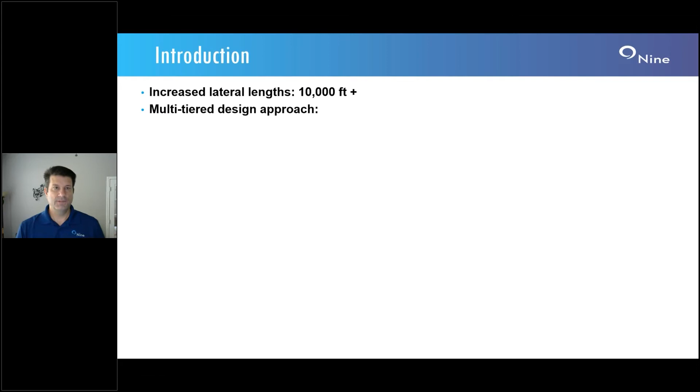And that may include all of what I'm talking about: addition of chemical pipe-on-pipe lubricants. This is probably the cheapest method to try to help us reach target depth. They are actually fairly effective. However, in a plug and mill operation, we'll see a lot of wellbore debris, sand, and of course the plug parts themselves. And these are, as the name implies, pipe-on-pipe, not pipe-on-debris lubricants. So you definitely get a decrease in effectiveness whenever you're dealing with a wellbore full of sand.

We can optimize the string design. There's a paper that I co-authored that was also presented earlier this year, which was 199843. And so this is really looking at individual wells and optimizing the taper designs to apply more weight on bit. What I would usually see is an increase of anywhere from 800 to 1,000 feet or so with optimizing string design. And then of course the last one is really the topic of this paper, and that's the addition of these extended reach tools.

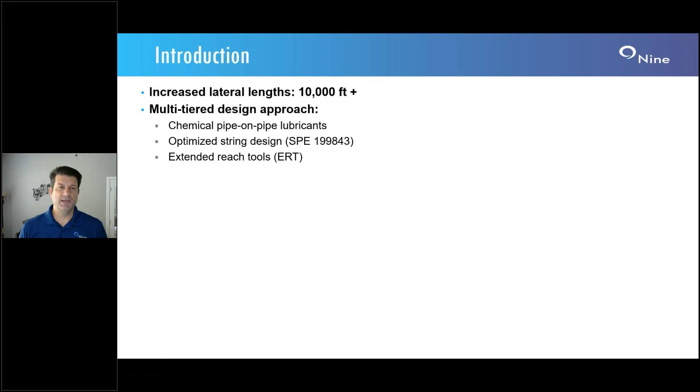And if we break out the extended reach tools into 2 sub buckets, we have mechanical inertia tools and flow interrupting tools. And for coiled tubing, the most predominant method is these flow interrupting tools. And as you may know, there's several of these out on the marketplace today. They all use a different mechanism to give that flow interruption. So there's a rotary valve, a poppet valve, and a fluidic flow modulation, just to name probably the top 3 in the marketplace today.

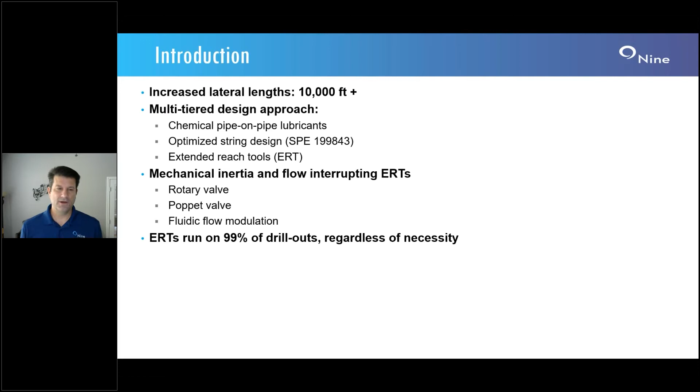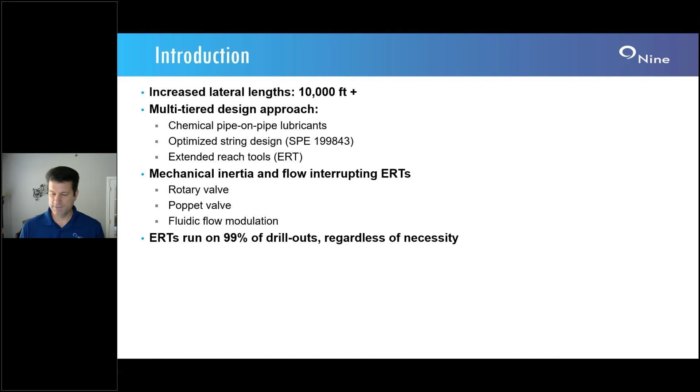And what I'm seeing in the industry today is that these tools are relatively inexpensive. So for the cost of the whole entire service that's out on location, adding an ERT on the end of the coiled tubing for the additional $1,200 or whatever it costs is pretty insignificant. So regardless of if we need these things, our customers are still running them. I'd easily say 99% of all the coiled tubing intervention drill outs were running an extended reach tool. And so that brings us to the challenge of how do we go about modeling these tools on the end of our coiled tubing?

So the most common model in the marketplace today, that's easily accessible by the majority of independent coil providers, has some default model assumptions. And these assumptions basically integrate a friction reduction factor: so many pounds force of friction reduced per barrel per minute of pump rate. And that ratio was really developed, I think, a good 15 years ago from some testing that was done. And since then, these tools have become much more powerful. So I think that some of those defaults, those assumptions, are no longer valid.

The newer tools on the marketplace have some modeling available, but they are kind of proprietary. So as these tools are proprietary to the tool service companies, so too are the models, and so they may not be really accessible by the end user. And regardless of which model we're using, I think there's definitely a combination of not only a friction reduction factor, but also a tensile end load that's applied onto the coiled tubing.

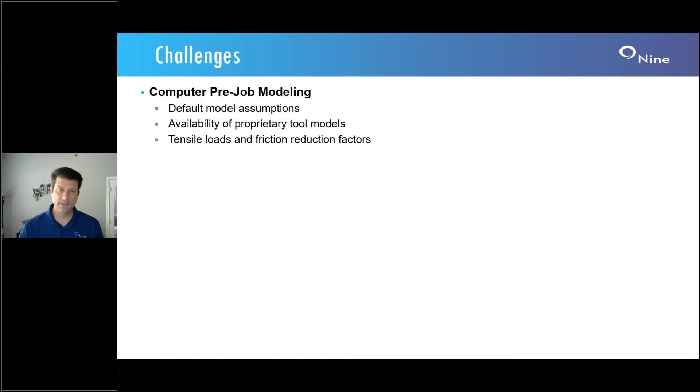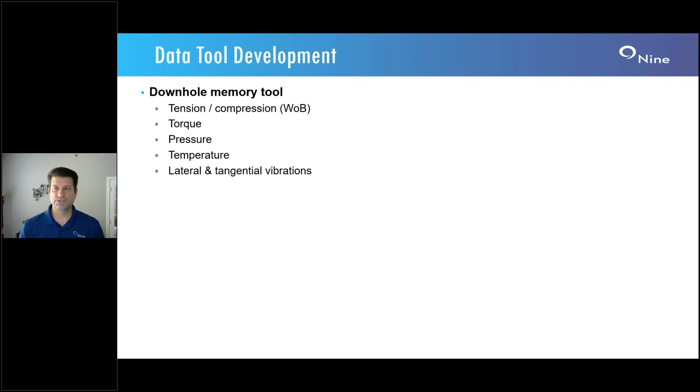So then we have the modeling, and then of course, what is really happening downhole? And so that led us to the development of putting together a memory tool. This downhole memory tool will measure our tension and compression, so this is our weight on bit. It measures the torque, the downhole pressure, downhole temperature, and we'll also look at lateral and tangential vibrational forces. And with this tool, we have recorded over 1,500 plugs drilled.

So I'm going to go into some case histories now. And I know I'm presenting for the Canadian chapter, so I apologize in advance that these are all API numbers, or US numbers. So you have to kind of do your own conversions in your head.

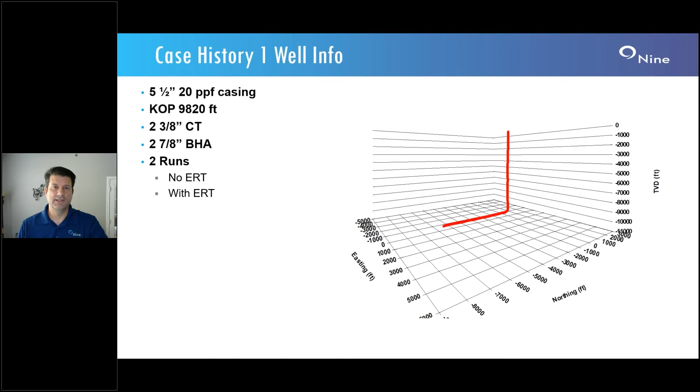But our first case history here is 5.5 20-pound casing. Kick off at 9,820 feet. We ran 2 3/8 coil tubing with a 2 7/8" BHA. This is an interesting case history in the fact that we had 2 runs. The first run and pull was without an extended reach tool, followed by a second run with the extended reach tool. And so I'm going to show you the data here, and as I go through these plots, I may tend to round some numbers, so forgive me for that.

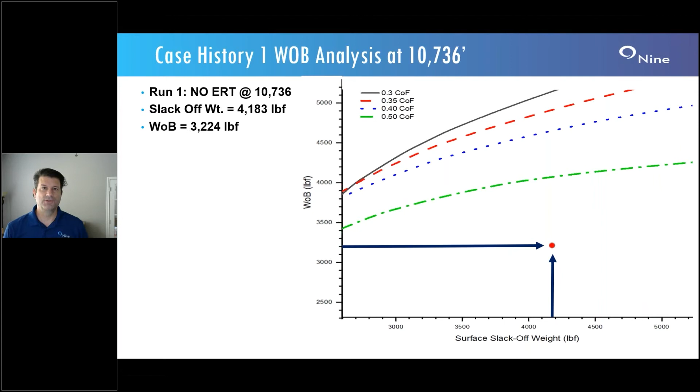Now, I don't show this in this case, but if we go in and do a friction match, we can actually friction match overall the weight, taking out the slack off weights during the plug mill outs, and we'll see about a 0.24, 0.25 friction coefficient.

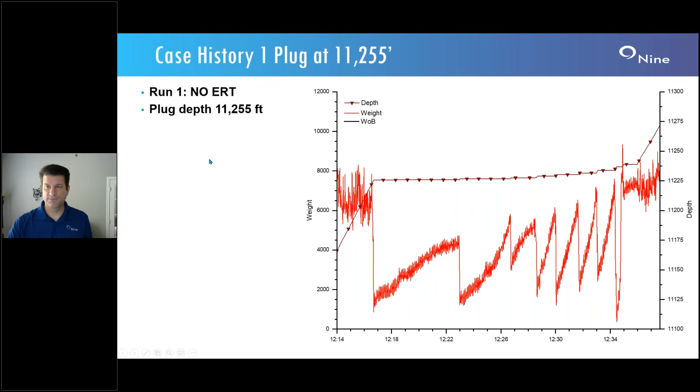Another example without the extended reach tool here is a little bit deeper into the well. So now we're at 11,255. Again, taking our average weight of 6,490 pounds, all the way down to a slack off weight, minimum surface weight of 1127, giving a slack off of 5363.

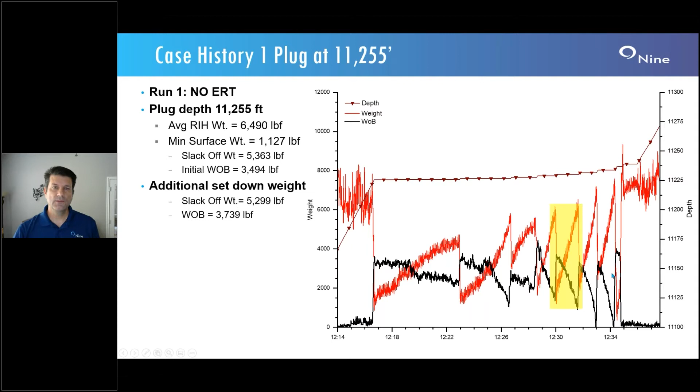Bringing in our downhole weight on bit in black, and we're seeing our initial weight on bit of 3,500 pounds roughly. And then again, you see as our surface weight returns to neutral, that we continue slacking off until we are through this plug in around that 20-minute mark. So took this area here, slack off weight of 5,300 pounds, yielding us weight on bit of 3,700 pounds.

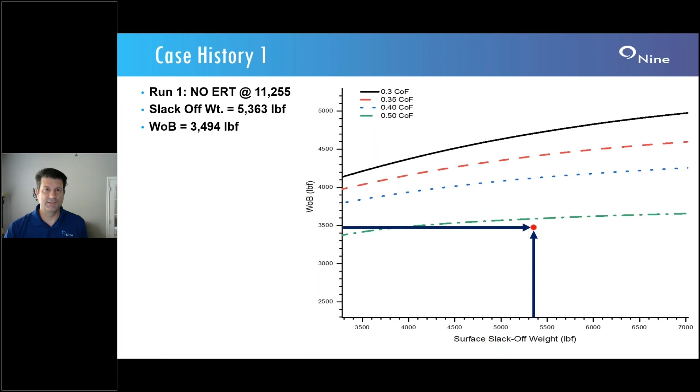So back to my sensitivity modeling again, slack off weight of 5,363, weight on bit of about 3,500 pounds. Yes, we are kind of close to that 0.5 friction coefficient, but I think anybody would agree that that is a very high friction factor to consider in a cased hole wellbore. If it was indeed 0.5, we would have a very difficult time in reaching TD of the well, which we did not.

So you saw the couple times there in roughly about 22, 25 minutes per plug. And so our customer got anxious and got tired of waiting for a normal plug and mill out time of the 20 minutes. And so we tripped out of hole and put on the extended reach tool. And this is a fluid flow modulation type of a tool.

And so we go back in, and this is at a plug depth of 13,000 feet. And right away, of course, we notice that our surface weight is much higher. We're now in the 15,000 range versus before, even at the shallower depths, we were about 6,400 pounds. So right away, we gained a lot of weight back.

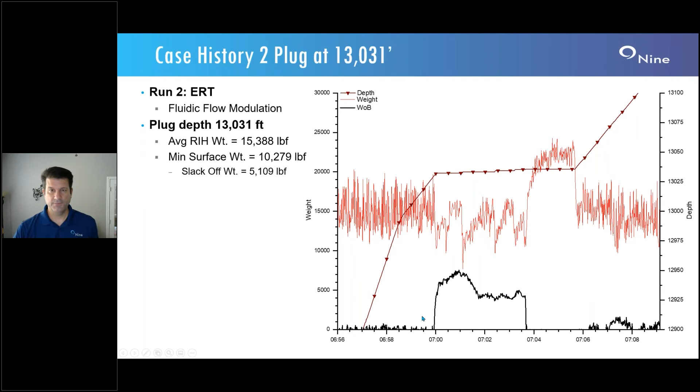So we tag the plug and we go down to the minimum surface weight of 10,300 pounds, yielding a slack off of 5,100 pounds. Bringing our weight on bit and picking our initial weight on bit, I'm seeing 6,000 pounds. But a little bit different here. What you see is actually the weight on bit is increasing. So it increases all the way up to 7,500 pounds in this particular example.

We'll go back real quick. Also note that you do see the sawtooth pattern, as we saw before, as our surface weight returned back to neutral, they slacked off more. But in this case with the extended reach tool, we do not see that same sawtooth pattern as we had seen on the prior examples.

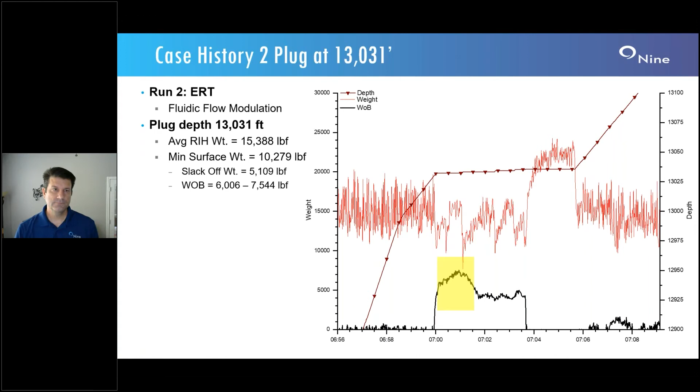So now trying to do the sensitivity analysis, I took about the same approach. I looked at different friction coefficients, but in addition to the friction coefficients, I also added the tensile end loads to try to approximate where we are with this tool on the end of the coil tubing. And so in this case, we had a slack off weight of 5,100 pounds, and our initial weight on bit of 6,000 pounds. So where that crosses is fairly close to this 0.2 friction coefficient and a 3,000 pound tensile end load.

If you talk to the tool manufacturers, they'll agree that these tools probably yield a 2,000 to 3,000 pound end load. And the 0.2 is not really out of the question, I would say, with the high flow rates that we had with 2 3/8 coil by the 5-inch casing. So that kind of matches there.

However, as you saw in that graph, our weight on bit continued to increase all the way up to 7,500 pounds. And so now we are outside of the range, as you see in this dot, of what I would consider anything that's really probable for what these tools can do.

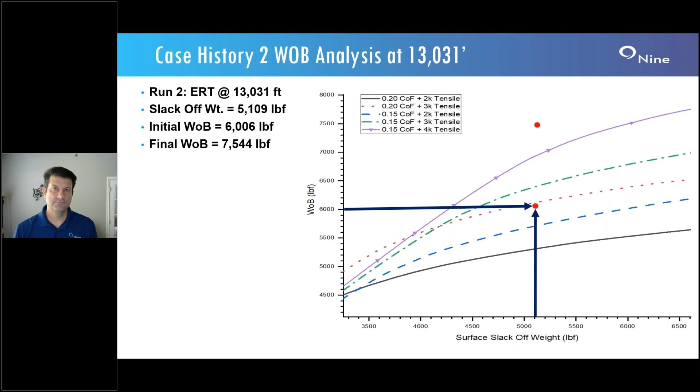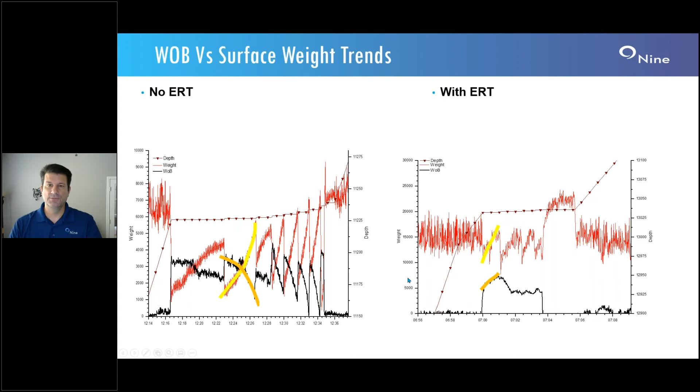On the left, as our surface weight comes back to neutral weight, our weight on bit decreases. This is what common thinking would tell us would happen. On the right, as our surface weight returned to neutral weight, our weight on bit continued to increase. So a little counterintuitive with the extended reach tools.

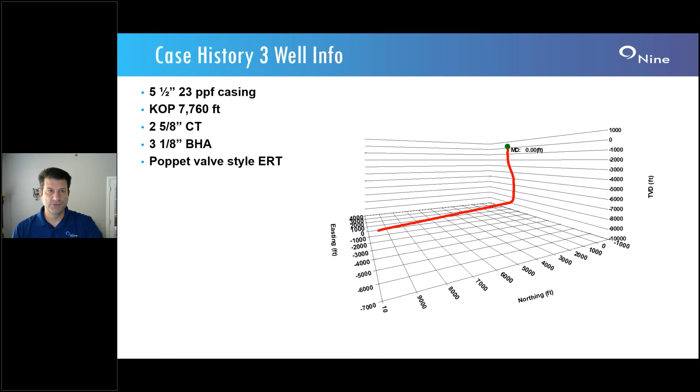So now I'm going to move on to another case with some bigger coil, which will also lead into a subsequent kind of extreme example case. So in this well is 5.5 23-pound casing, kickoff at 7,760 feet, 2 5/8 coil, and a larger BHA. We're running a 3 1/8-inch extended reach tool with the Poppet valve style extended reach tool.

And so now we're going to look at a plug here at 14,722 feet. Our average run in hole weight before tagging this plug is about 16,500 pounds. Our minimum surface weight drops down to 10,350, yielding a slack off of 6,120 pounds. So I bring in our downhole weight on bit gauge. Our initial weight on bit starts off at 6,000 pounds, and it grows all the way up to 11,700 pounds.

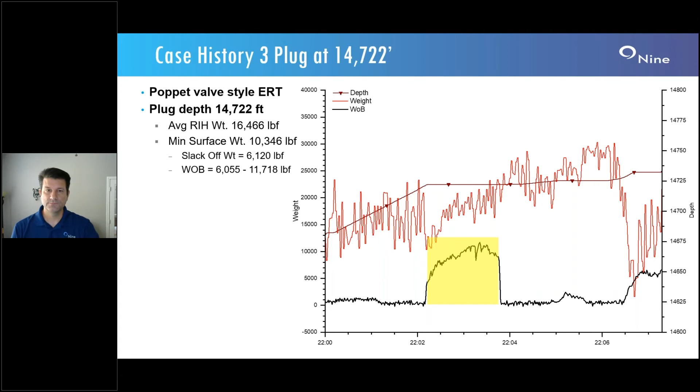And so trying to model this with our sensitivity analysis, again, looking at different friction coefficients here and different tensile end loads. Our initial slack off weight is 6,120 with our initial weight on bit of 6,100 pounds. That puts us in the crosshairs of between 0.2 and 3,000 tensile, or 0.15 and 2,000 pound tensile. So either one of those, probably the red dotted line is more in line with a 3 1/8 Poppet style extended reach tool. But as we saw, our weight on bit continued to increase to 11,700 pounds.

And so that puts my dot up here in my title area for this slide. So far outside of the range of what I would say a model would be able to predict.

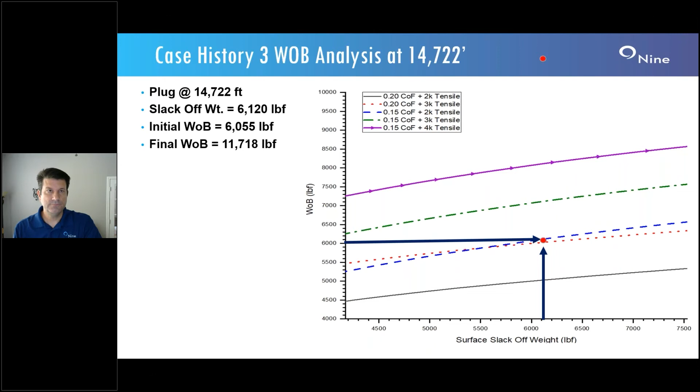So on this same run, we had a little bit of interesting phenomena. As we continued to run in hole, we started to detect that we're not seeing the pressure differential from the motor. So our tool supervisor from the tool company wanted to try to give some weight on bit to see if he can build up any differential pressure to determine if the motor was actually working. And so that's what we did here, and we actually tried it 3 times.

So this is at 15,780 feet. We're running in hole with an average run in hole weight of about 16,000 pounds. And we kind of stair-stepped it all the way down, and he had us go all the way down to minus 8,200 pounds on our weight gauge. So we're at a fairly extreme slack off weight of 24,000 pounds.

And now I bring in our downhole memory gauge. As you can see here, our initial weight on bit was about 35,000 pounds, and it continued to increase to a maximum of 37,000 pounds weight on bit. So we picked up and decided to try it one more time.

And looking at our second attempt here, our minimum surface weight now is almost minus 10,000 pounds. So a slack off weight of 25,000 pounds. And then looking at our maximum weight on bit, in this case, it goes up to 41,000 pounds.

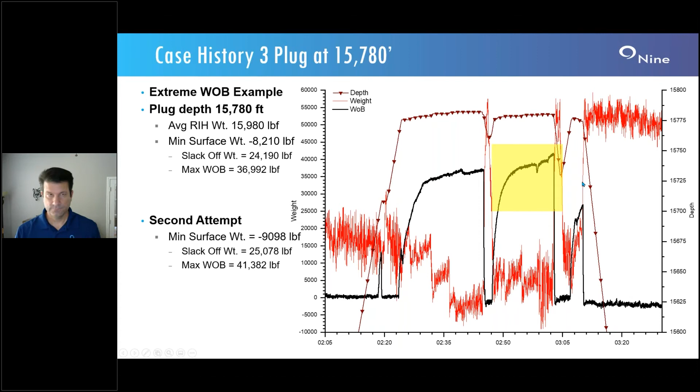So now I'm going to move in and talk a little bit about the vibrational forces that we see from these tools. So the memory tool has G-force sensors in the X and the Y axis. And so what that means downhole is the X runs longitudinally with the coil tubing. Positive means towards the bit, negative means towards surface. And then the Y is our side to side.

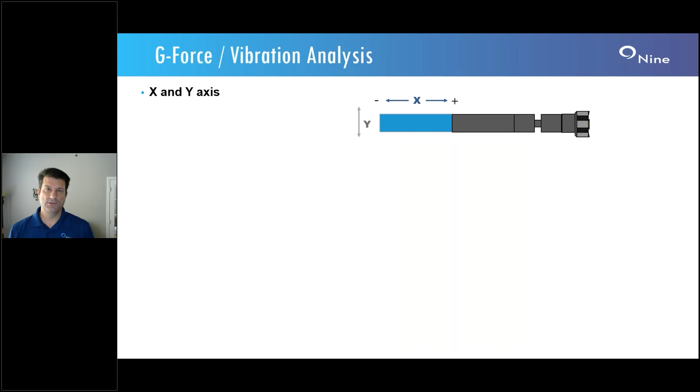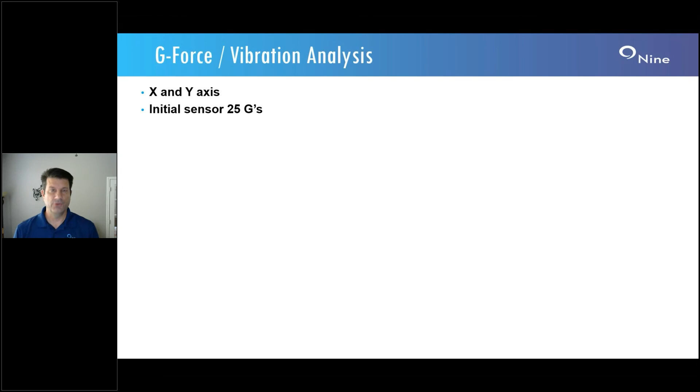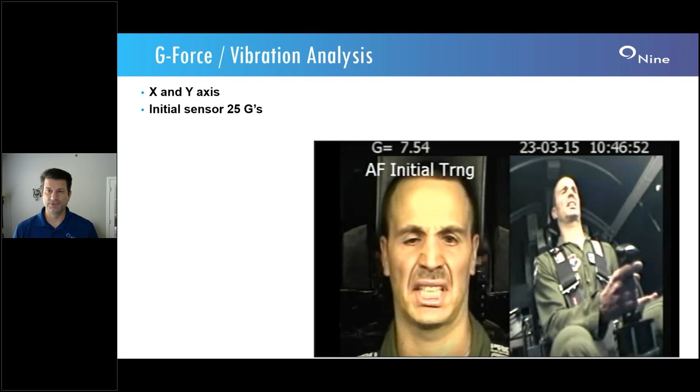When we first built the tools, we had to pick a G-force sensor. And so an available one and one that we anticipated was sufficient enough was 25 Gs. After all, we kind of looked around at other G-forces, and I kind of like this picture from flight training school. So this is what 7.5 Gs will do to your face. And so for sure, we thought 25 was more than sufficient. Unfortunately, we were incorrect in that assumption. And so then later we did upgrade the tools to 100 Gs.

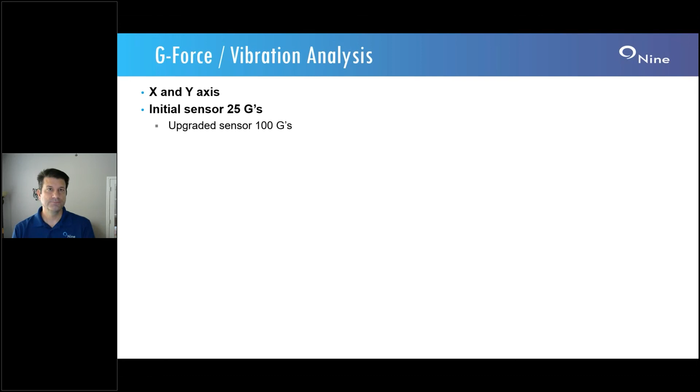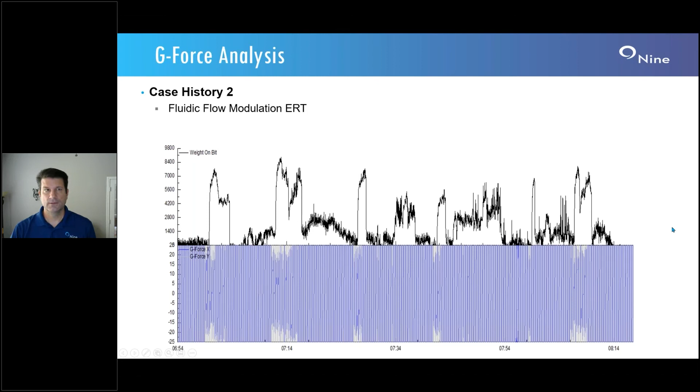So I do have an example here with our 3 1/8 Poppet style extended reach tool. Not exactly from the case history I showed you, but it's still the same diameter, 3 1/8, running on 2 5/8 coil. And so now this is our 100 G sensor. And so during the course of the job, plug to plug times, we're seeing in the X-axis, we are averaging probably about 50, 55 Gs, peaking around 75, 78.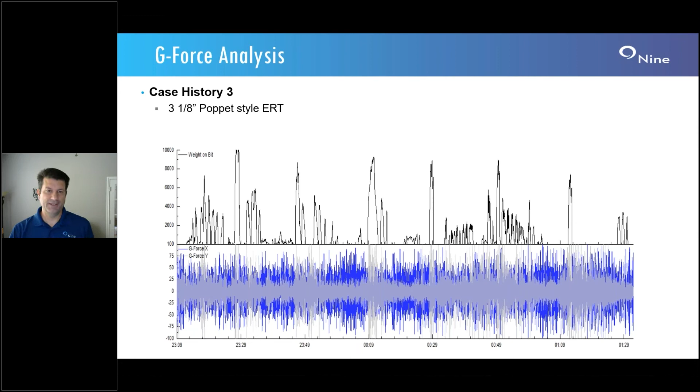And then when we're actually milling a plug, we're seeing a little bit more side-to-side vibrations. We're actually peaking over the 100 G. So the 100 G sensor still is not enough to capture all of the data here. So these tools are really hammering downhole. There are a lot of forces happening, a lot of vibrations.

Okay, so kind of giving a summary on the weight on bit that we're seeing. These are from my examples. So our 2 3/8 coil tubing from our case history 1 inside that 5.5 20 without the extended reach tool, we see putting in 4,100 pounds of slack off weight into the system, downhole we're getting 3,200 pounds. And what I'm doing here is just taking the difference of weight on bit minus surface slack off. And so in all cases, without the extended reach tool, we get significantly less weight on bit than what we're putting into the system. Again, this is what intuition would normally tell us.

Then we run our extended reach tool, and we put in slack off weight of 5,100 pounds and maximum weight on bit of 7,500 pounds. So we're getting significantly more in that case. We run the larger 3 1/8 inch extended reach tool, the Poppet style, where we put in 6,000 pounds of surface slack off weight, and downhole we were getting 11,700. And then my extreme example where we put in 24,000 pounds, got 37,000 pounds weight on bit. So we're seeing fairly significant differences between weight on bit and the surface slack off.

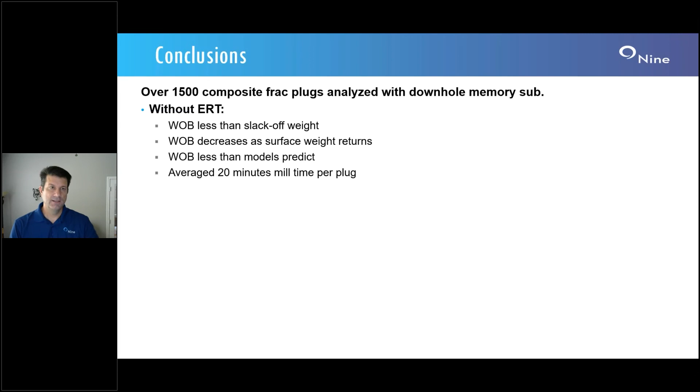And from these plugs that we milled out, we're seeing an average of 20 minutes. These times coincide with all of the surface testing that I've done with different plugs, where an average mill out time would be expected to be 20 to 30 minutes without a tremendous amount of weight on bit.

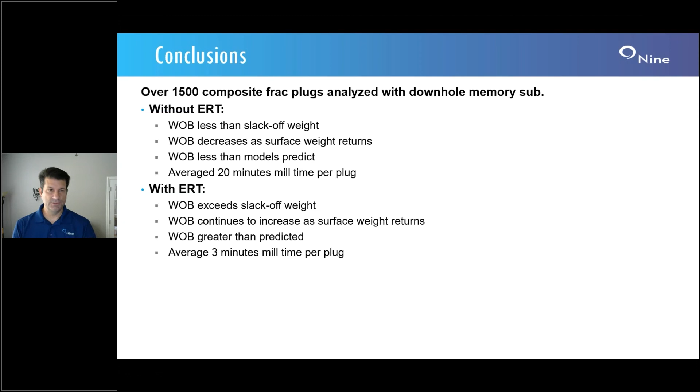So then we add our extended reach tool, and I'm saying that our weight on bit exceeds the slack off weight. And counterintuitively, our weight on bit continues to increase as the surface weight returns back to neutral weight. Our weight on bit is much greater than predicted. And as would be expected with the high weight on bits, we do see a much faster average mill out time per plug.

And then in these extreme examples, if we put a whole lot of force into it, excessive surface slack off, we'll get an order of magnitude of weight on bit downhole. And so what I have deduced is that with the extended reach tool, if the tool will get us to that target depth, once there, that extended reach tool will continue to apply sufficient weight on bit to drill through the plugs.

And then the other thing is we're seeing tremendous forces downhole from these vibration forces. I do believe that these excess vibration forces are contributing to some coiled tubing issues, early premature failures, particularly at shallow depths of 2,000 to 3,000 feet while pulling out of hole. I know that there is some ongoing research surrounding those kind of unexplained failures, but I definitely think there is a tie-in between that and these extended reach tools.

In addition to that, we also are seeing an increase in tool thread failures that are probably attributed to the vibration forces that are encountered downhole.